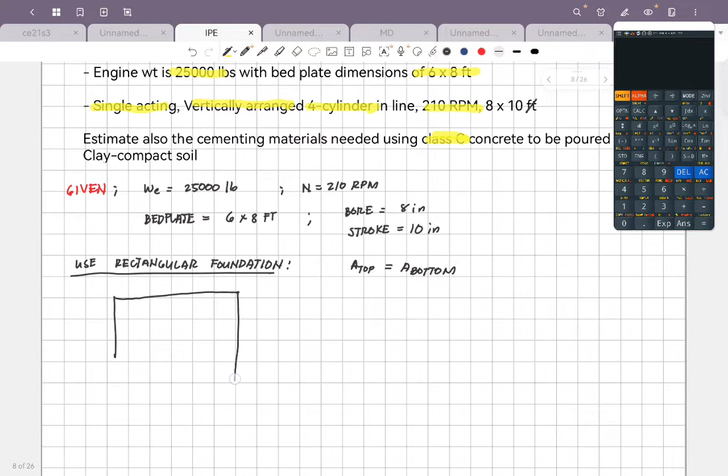Okay? So, the first thing that you need to consider is use rectangular. Use rectangular foundation muna. Okay, use rectangular foundation. Yan ang pinakauna mong i-choose or the first one on your choices. Okay. On a rectangular foundation, we know that area of the top is equal to area ng bottom. Same lang yun. Okay? So, drawing natin for a rectangular block. So, ito yung top view. Okay? So, nandito yung bed plate mo. Nasa gitna.

Okay? So, meron ka dito ang clearances. Clearance yan. Ito, clearance to. Clearance. Okay? So, anong dimension ng bed plate mo? This is 6 by 8 feet. Yan, ha? We say C is equal to 1/2 feet. Diba? Yung consideration mo from 1 feet to 1/2 feet. So, gamitin natin, this is equal to 6 inch. Tignan natin kung okay ba yung dimensions natin. If not, i-adjust natin siya.

Kasi yung bed plate, that is machine specified na. Hindi mo pwedeng baguhin yung dimension ng bed plate. Ang tanging mag-a-adjust ka, clearance. Okay? Clearance and height. Remember that. So, what will happen is, yung length mo, nasaan ba yung length? Ito yan, length. Yung width. Nasaan yung width natin? Ito. So, length natin is yung 8 feet plus 2 times 0.5 feet. Okay?

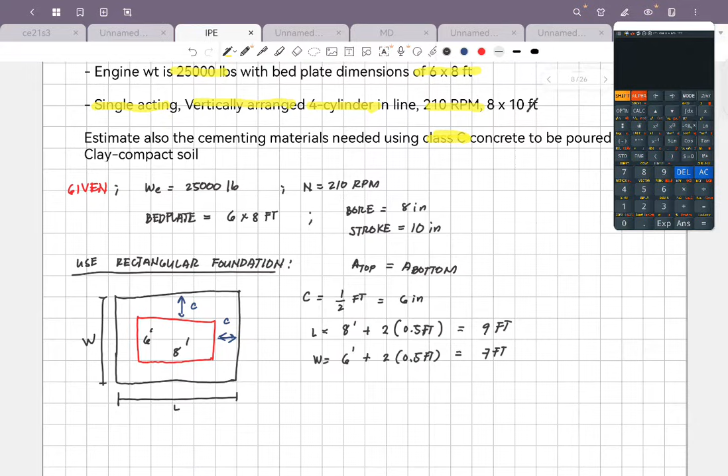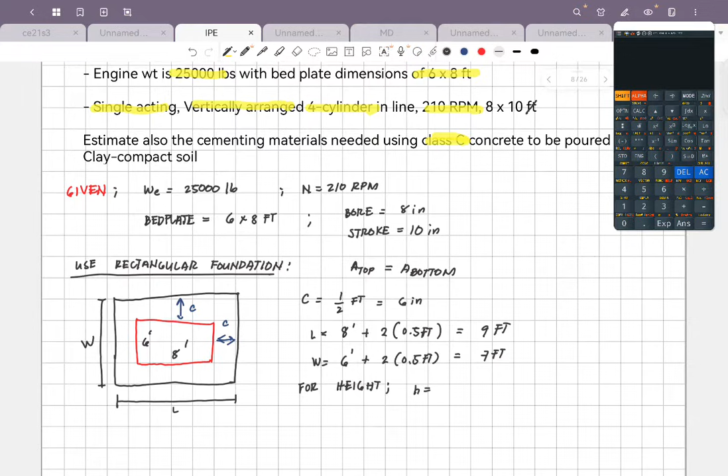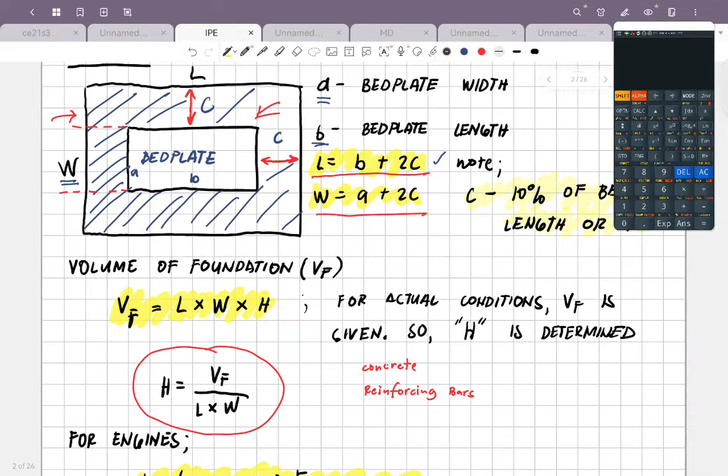Yung width natin is 6 feet plus twice of 0.5 feet. So, this will be equal to 9 feet and 7 feet. Yun yung magiging foundation and area natin. Now, for the height, we say na for height of foundation, H is equal to, pwede natin ma-solve. Ano yung sinabi ko pag may weight ng engine ang binigay dyan? Or the stroke. Diba? Recall natin dito. That, yung height ng foundation can be this one.

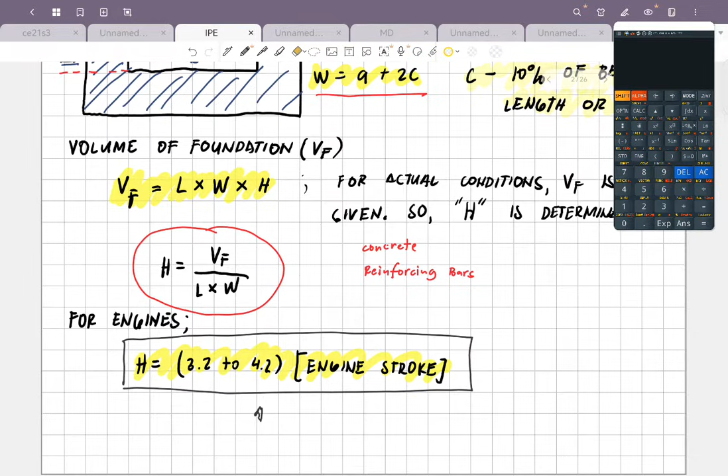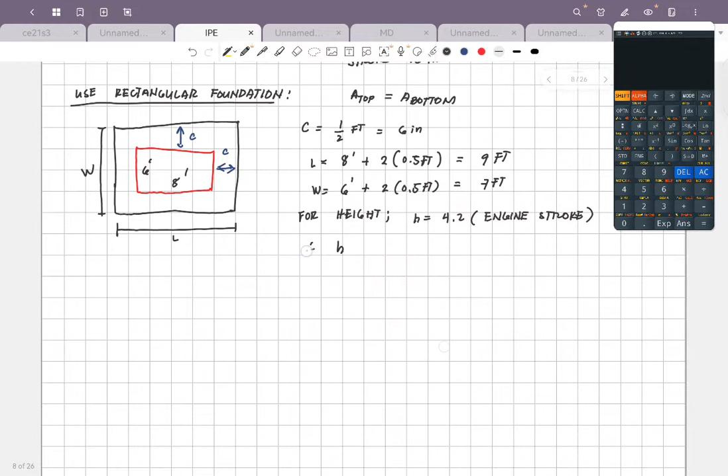Engine stroke. 3.2 to 4.2 ng engine stroke. Okay? So, ang sineselect ko dito, parating yung maximum. Okay? Maximum yan. Select for the maximum. So, empirical formula, 4.2 times engine stroke. Okay? So, the height, therefore, is 4.2 times, ano yung engine stroke nyo dyan? Ilan? 10 inch, correct. 10 inch. Times, dapat naka-fit din, di ba? Times 1 foot every 12 inch.

So, this will be equal to, calculate natin. So, 4.2 times 10 divided by 12. 3.5. 3.5 feet pala siyang taas niya. 3.5 feet. Okay, that is the height. Now, let us solve for the volume of the foundation. Since yan yung volume ng foundation, we can say yan din yung volume ng concrete na gagamitin mo. Okay? So, the volume of the foundation is the volume of concrete to be used.

Okay? Remember that. So, VF is equal to length times width times height. So, this will be equal to 9 feet times 7 feet times 3.5. Feet cube lalabas dito. 3.5 times 9 times 7. This is 220.5. Okay? 220.5 cubic foot ng concrete. Concrete na to. Ayan. So, meron na tayong value for concrete.

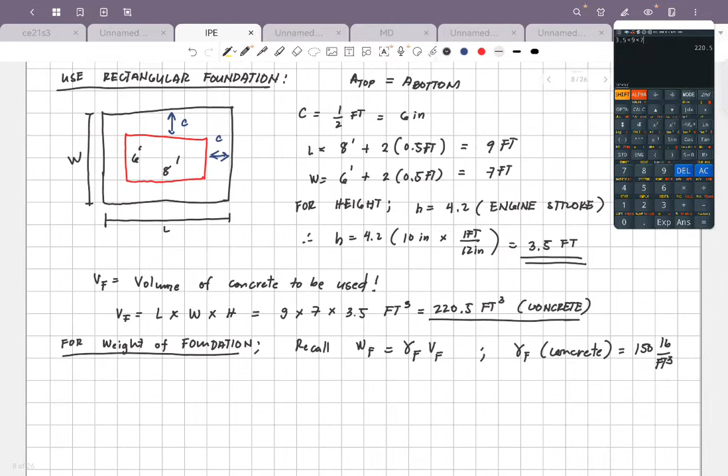Okay. For the weight of the foundation, di ba, recall natin that yung weight ng foundation is equal to gamma ng foundation times the volume of the foundation. But the gamma of the foundation is concrete, di ba? Which is concrete. Binigay ko kanina that it is equal to 150 pound per cubic foot. So, masosolve ko na yung weight ng foundation.

Therefore, the weight of the foundation is equal to 150 pound per feet cube times the foundation volume, which is 220.5 feet cube, equal to 220.5 times 150. 33,075. Okay, ang lalabas dyan. 33,075 pounds. Okay, yan yung weight ng foundation natin. So, cancel to. So, i-check na natin.

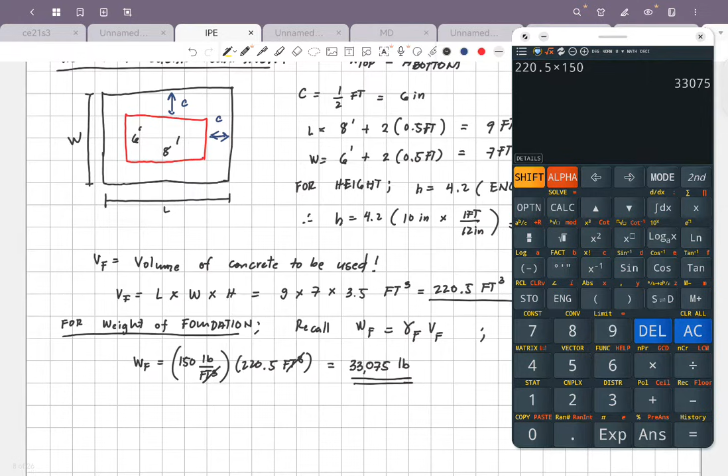Try to check for the minimum weight. For weight minimum, okay, babasehan natin yung weight ng engine. Okay? So, meron ka empirical formula: weight minimum equals e, empirical e, times weight ng engine, square root ng N. What is the weight of the engine? Nakalagay dito, 25,000 pounds, tama?

So, empirical, titignan natin sa table. Okay, going back to the table, anong sabi dun sa ating machine? That is single acting inline, 4-cylinder. So, ano i-select natin? Single acting, vertical, inline, 4-cylinder. Empirical formula natin is 0.11. Okay? Naintindihan? Diba? Ganun ginagamit yung table. O, getting back to the calculation.

So, E is equal to 0.11 na sa table. Table value. So, E is 0.11. Weight of the engine is 25,000 pounds times square root ng gaano siya kabilis umiikot? 210 RPM. Okay, what is the minimum weight? 0.11 times 25,000 times square root ng 210. 39,851.2861 pounds. Correct? Check nga natin if this will be encompassing.

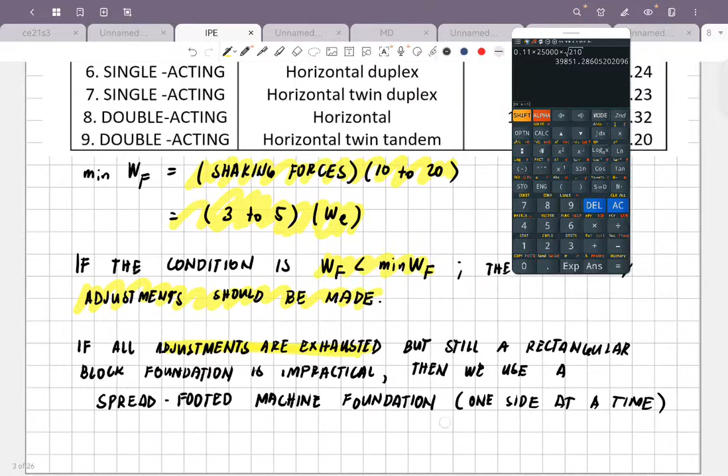Okay, take note. See that? Ano yung consideration natin? Yung weight dapat ng foundation should be greater than or equal ng weight ng minimum. Nasaan nga ang consideration yun? Okay? If weight ng foundation is less than, adjustment should be made. Dapat, mas malaki yung weight ng foundation kaysa sa minimum weight. Okay? Kasi yun yung i-carry niya eh. Babagsak yan.

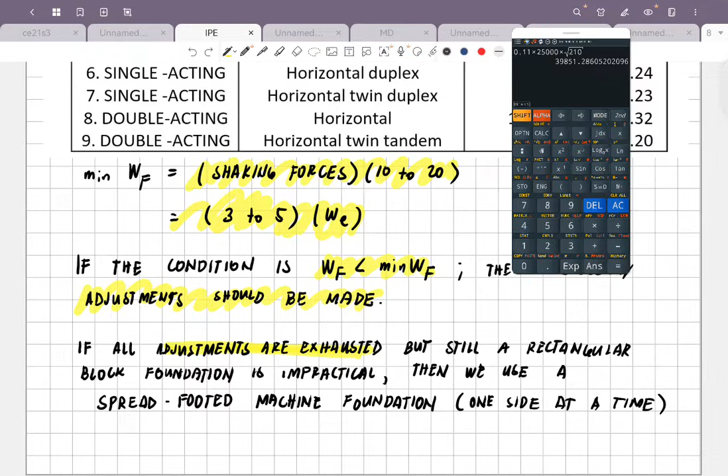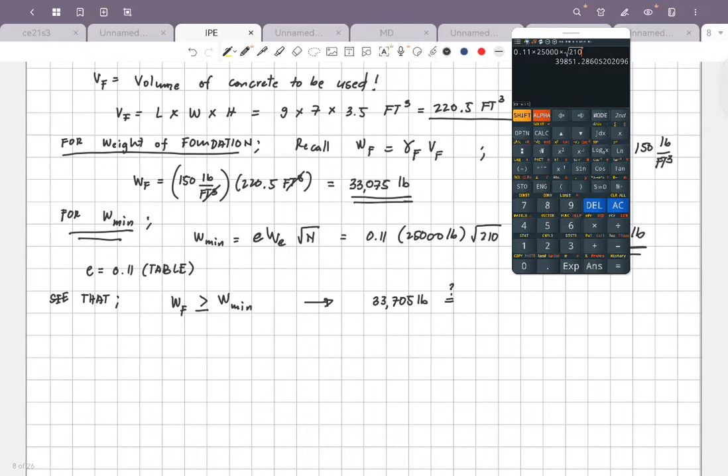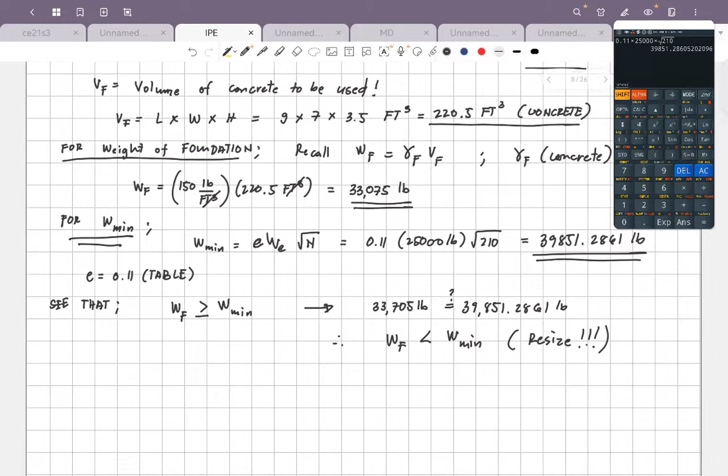Check natin. For the value, yung weight ng foundation is 33,075 pounds. Question mark. Tapos ito, 39,851.2861 pound. So, therefore, weight ng foundation is less than that of your weight ng minimum. So, ibig sabihin, resize. Resize yan. Not okay. Saan tayo hahabol? Sa C. Sa clearance. So, not okay. Not acceptable.

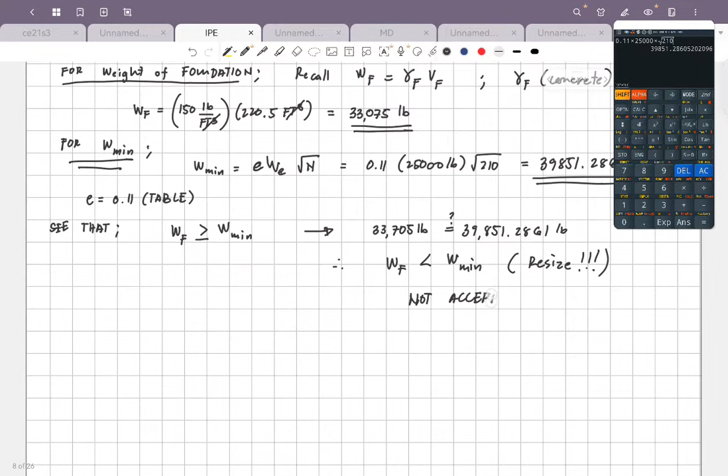Okay. Since not acceptable siya, go back to adjustment. C, dimensions. I-maintain na lang natin yung height. Height, same na lang. Yung C dimension natin, babaguhin natin siya. So, let us say C is equal to 1 foot. So, bago na. Yung length natin is 8 feet plus twice ng 1 feet. This will be 10 feet. Yung width natin is 6 plus 2 times 1. This will become 8 feet. Same calculation ulit. Babalikan lang natin.

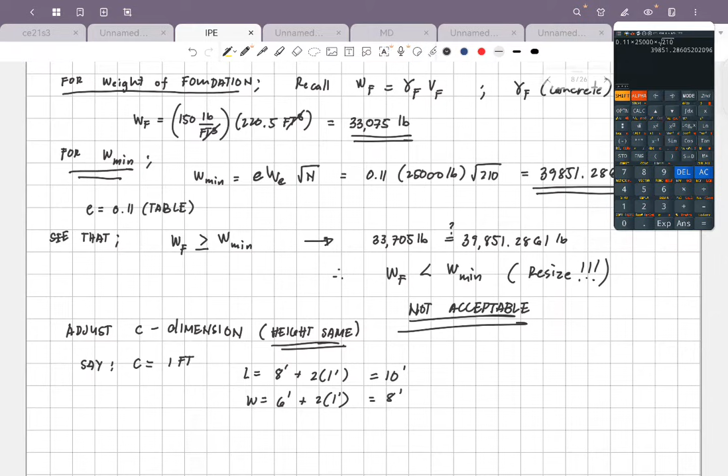So, the corrected volume ng foundation is length times width times height. So, 10 times 8 times 3.5. This will become 280 feet cube. Yan yung volume ng foundation. So, we can get the adjusted weight ng foundation: gamma F times volume foundation. Recall natin, 150 pound per feet cube times 280 feet cube. So, cancel itong dalawa.

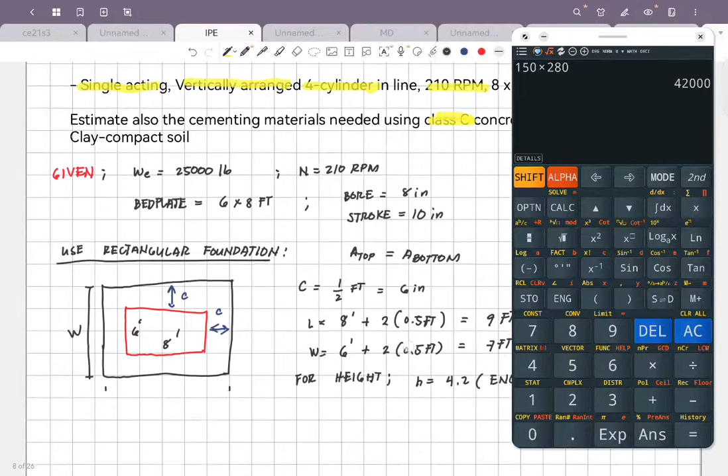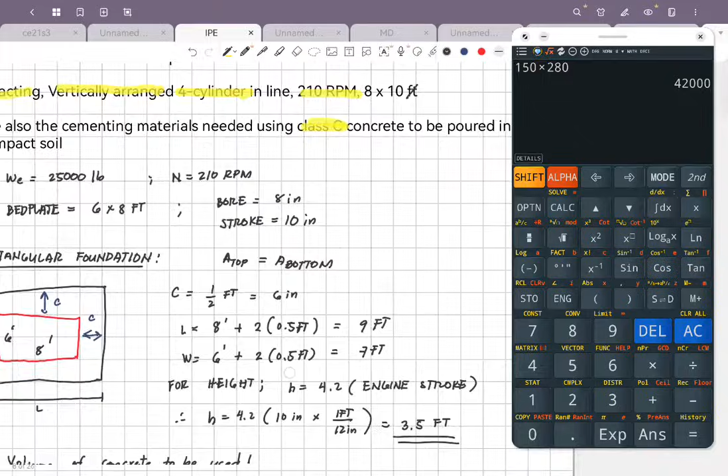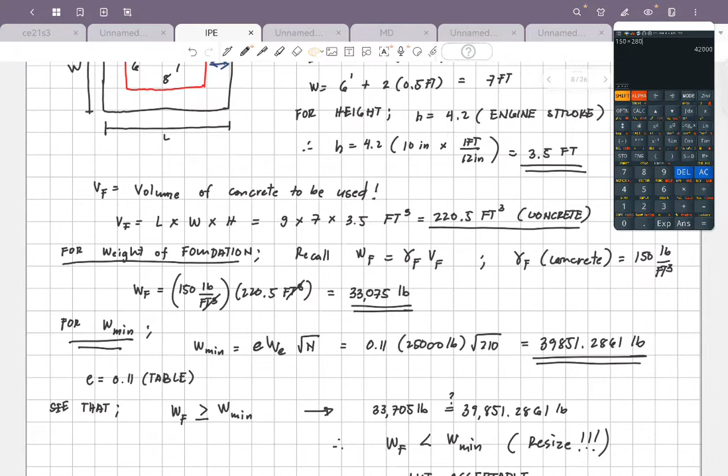Equal to 150 times 280. 42,000. O ngayon, check na natin. Therefore, weight of the foundation is greater than weight ng minimum machine. This became 42,000 compared to nakuha nating sagot kanina, which is 39,851.2861. Tama ba? Okay. Copy ko na lang. Ganun lang naman kadali eh.

Ayan ha. Ibig sabihin, okay na to. Dimensions are acceptable na. So next, what will you do? We check for the safety naman dun sa papatungan niya. So, checking for safety. Paano mo i-check yung safety? Dapat dyan, yung SI, induced stress, is less than sa design. Okay? So, ano ba yung SI natin?

Okay? So, next page na tayo. Dagdag pa tayo sa pang page. Yan. So, nasaan na tayo? Sand, gravel naman. Absolute volume, gravel. This is for gravel. Ano yung binigay ko sa gravel? 96, tama? 96 pound per feet cube. What about the mix? 6, tama? 6 feet cube per bag cement. Divide by

ano yung kanyang 2.3 to 2.5. Gamitin na natin 2.5. Okay lang. 2.5 times 62.4 pound per feet cube. So, edit na lang natin. This is 96 times 6 divide by 2.5 times 62.4. 3.69231 feet cube per bag of cement.

Okay. How about yung water? Absolute volume ng water. This is, syempre, 7 gallons per bag cement times 1 cubic foot per 7.481 gallon. Equal to 7 divide by 7.481. This is 0.93570 feet cube per bag cement. Okay, yung yield. Lahat na yan, pag nakasolve na kayo dito, store nyo to kay A, store nyo kay B, tapos this is C, this is D.

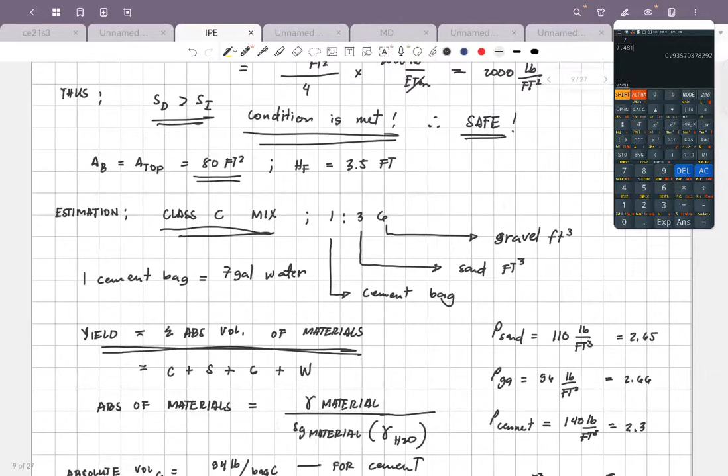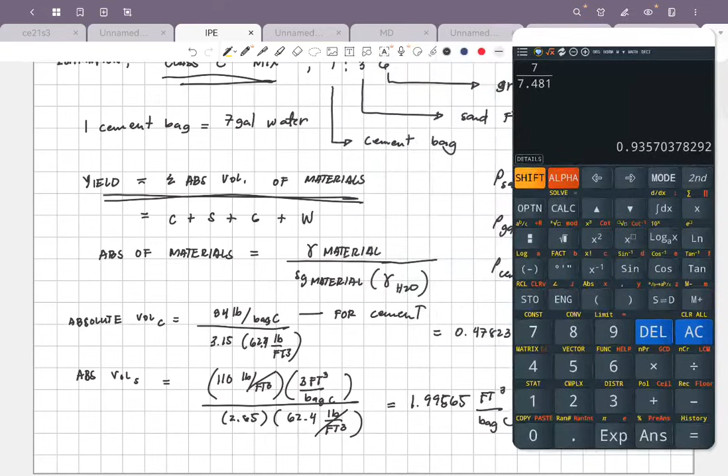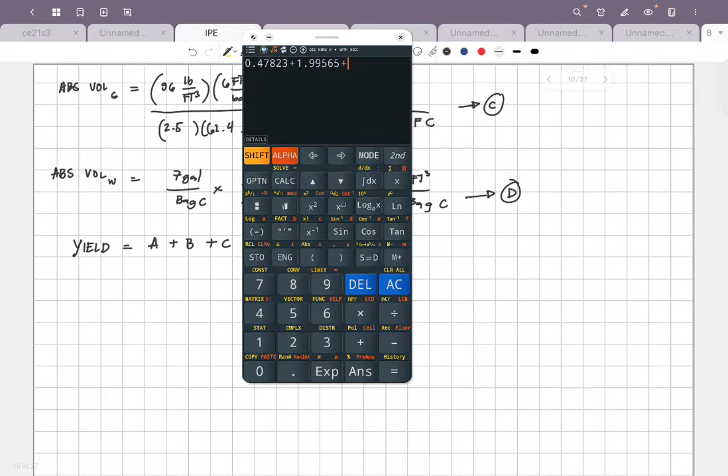So, A plus B plus C plus D equal to, okay, calculate natin. Lipat ko lang. Lipat natin dito. So, 0.47823 plus 1.995 plus kabilang page, okay, ganyan talaga mag-solve nito, matagal-tagal. 3.69231 plus 0.935, 7 point, correct ba?

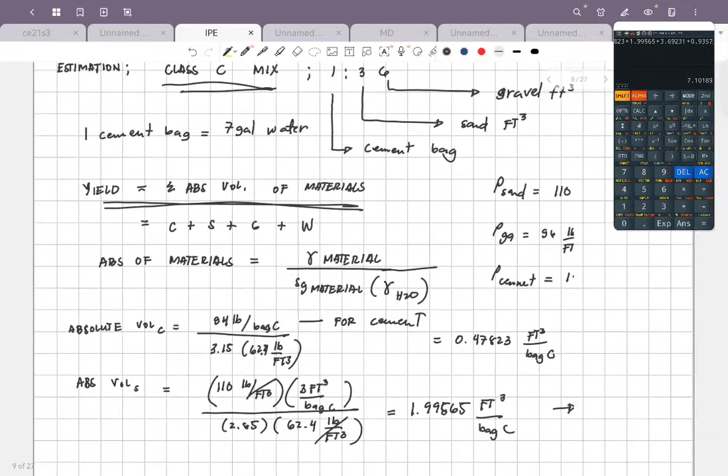7.10189 feet cube per bag cement. Kaya lang, pag pinaghalo-halo mo, ano na yun? Concrete na siya. Okay, sundan nyo lang yung solving niyan. So, yan ang yield niya. So, we can now solve for VF. Yung VF niya is, relax lang kayo. So, ilan yung VF natin? Kung natatandaan natin, volume of the foundation, 280 feet cube. Correct? 280 feet cube concrete.

So, masosolve pala natin yung bag of cement. So, for number of bags, equal yan sa VF over yield. 280 feet cube per 7.10189 feet cube per bag. Ilang bags? 280 divided by 7.10189. That is 39.426. Approximately 40 bags. Yan yung gagamitin mo. Matatansya mo na ngayon yun sa foundation mo. So, ganun lang yung tansyahan niya. You use 40 bags of cement para sa foundation.

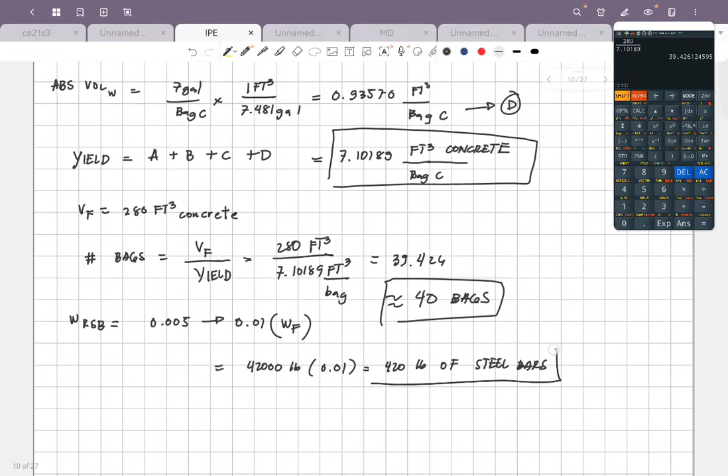How about yung steel bars? Weight of reinforcing steel bars. Meron kang konkreto, meron ka dapat bakal. That is 0.005 to 0.01 ng weight ng foundation. So what is the weight of your foundation? Na-compute natin, di ba? Ayun, 42,000. Ano yung 1% ng 42,000? 42,000 pounds times 0.01. Di 420 pounds of steel bars. Ako pinafollow ko lang yung mga ways dyan.

Now, merong extra pinasosolve dyan, yung volume ng sand. Volume ng sand, multiply nyo na lang yung number of bags. So, 40 bags times, ano yung sand mo? Diba, 3 cubic foot per bag. So, ilan? 120 feet cube. Eh, yung volume ng graba, you have 40 bags times 6 feet cube per bag. Ilan? 240 cubic foot. Yung water, ilang gallons? 40 bags times 7 gallon per bag. Ilan po? 280.